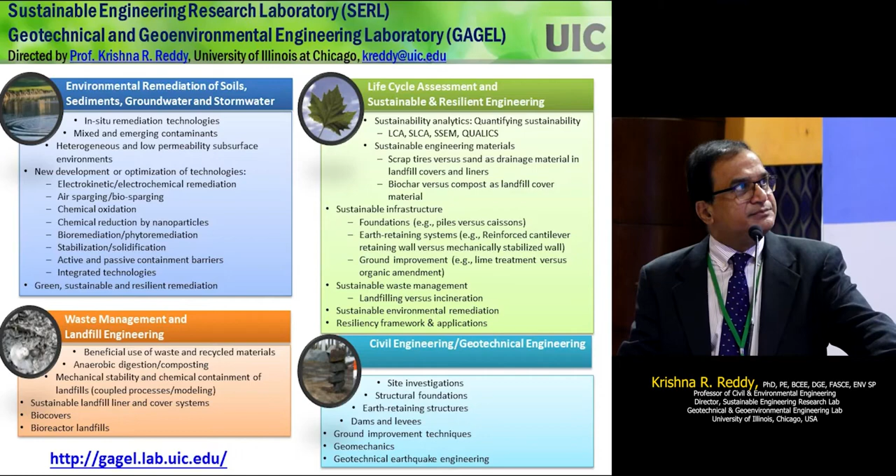I want everyone to take a step back and just think about it: what are the grand challenges that we have going forward? I know we're talking about climate change, but let's step back and see what are the greatest challenges we have in front of us into the future. Of course, the theme of this workshop is climate change, and that is going to be a grand challenge going into the future because of all the consequences we're seeing. It's going to impact current generations. We are all feeling it, and it's going to impact future generations also.

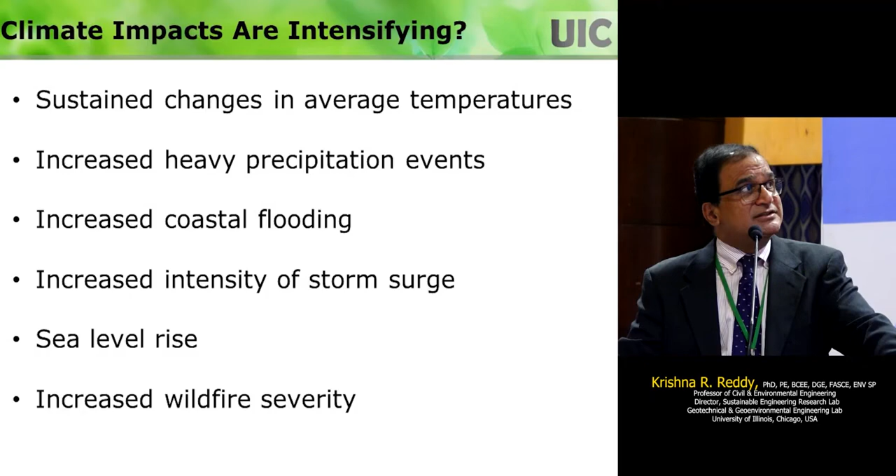We need to act. That's why climate adaptation is important, and climate adaptation is also known as resilience. The definition of resilience is this: whatever you are dealing with should have an ability to cope, adapt, and grow in the face of foreseeable climate and extreme weather impacts.

It could be flooding, extreme heat, or sea level rise, over the life cycle of the project. So think about not today or tomorrow, but if a roadway is going to be built for 50 years, you're talking about what the impacts will be in 50 years.

This graph shows: you design as usual, then an extreme event happens, and you compromise performance — it goes down, and hopefully it doesn't drop to the level of a disaster or catastrophic failure. Hopefully you maintain some acceptable performance, and after the event retreats, your system should return to acceptable levels, or in an ideal situation, back to the same as original, or in a very idealistic sense, perform even better than what it was initially designed for.

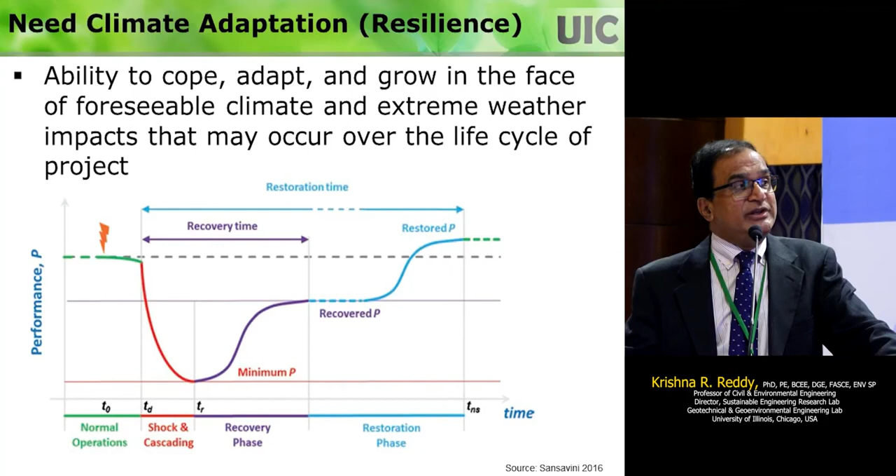So this is the challenge that we have. This is climate adaptation, or designing for resiliency. This means we need to be thinking about these things as we go into the future.

So how do we do this? There are a lot of different ways to do it. I call this one the adaptive management methodology, or climate resilient design framework. So what do you do? You identify the climate change hazards of concern, what is in your area, right?

These climate impacts affect different places very differently. If I'm not in a coastal area, I don't have to worry about sea level rise, if I'm inland. So what are the climate change hazards that you have at your location? And then you identify which ones you really are going to be worried about among the hazards of concern.

And then, whatever you are designing, you evaluate the performance of that. And if you are compromising the performance, what are the risks associated with that? This is called vulnerability assessment.

So you really need to think about, you need to do this for anything that you are concerned about. So if you have a high risk, then you need to do something, right? So you need to look at these resilience measures. How can you change your design?

If it's a new thing, you can incorporate it in a new design. But if it is an existing system, what can you do to make sure that it does not undergo damage if this perceived climate change hazard really happens? So you look at different options. You will have multiple options.

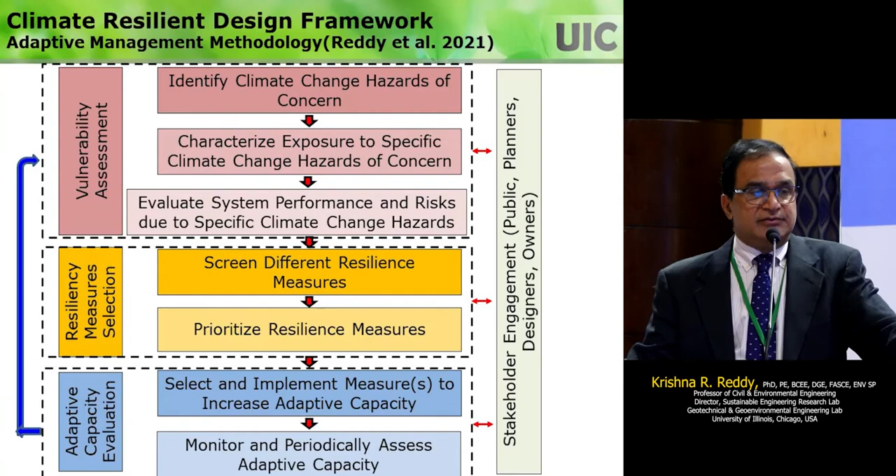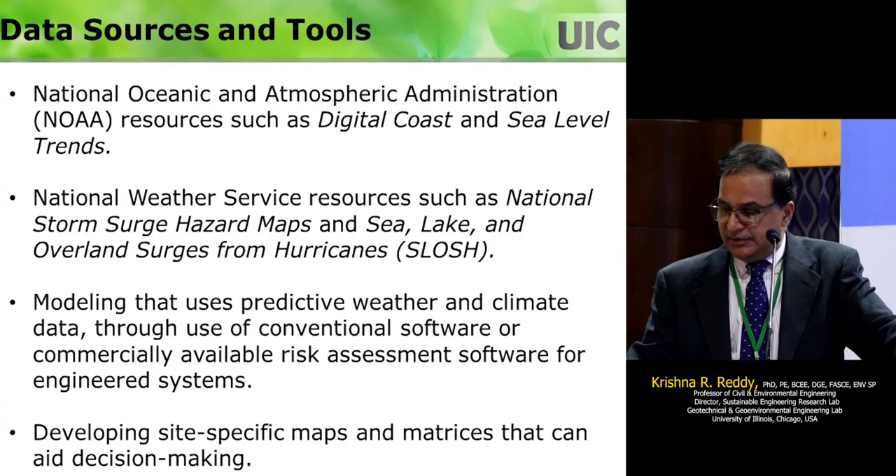And in the US, we have a lot of data sources and tools to look at these climate hazards. We use NOAA and the National Weather Service, and we do some modeling, and we can develop site-specific maps and matrices for design decisions. So one of the biggest things is what hazards we need to design for.

So I want to give you a simple example of resilient design. Let's say this is the building. This building is being proposed at a place called New Orleans in the US, right? So what do you see in this building? Generally, the foundation is at the ground level. Here, the foundation is not at the ground level, it is elevated.

Why? Because at this location, flooding is expected. And they modeled it, and based on that modeled depth of the flooding, they raised the foundations of the building. So this is what we are thinking about when you talk about resilient design - thinking about what kind of hazard we're going to have into the future, and then incorporating that now before we wait until that thing happens and undergo the damage.

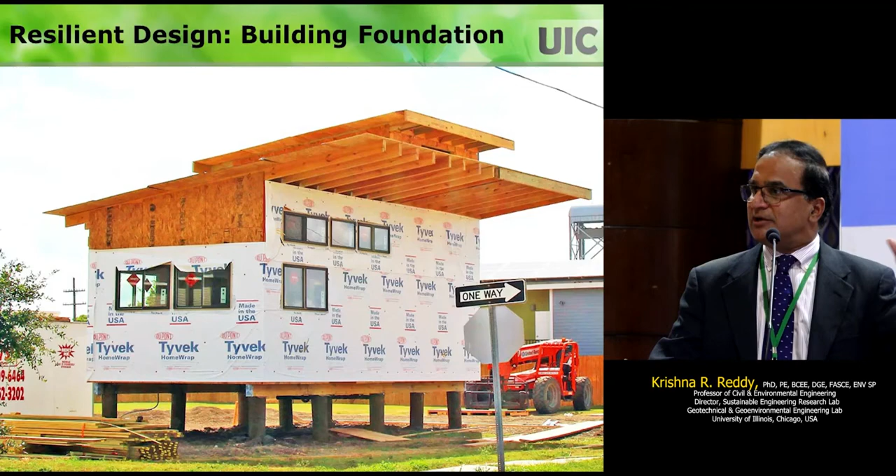So this example clearly shows a lot of things are happening like this in the US in actual designs. And this is actually built. This is a library building in New Orleans.

You just don't want to say, oh, I have a foundation raised, and I'm not going to have any problems. You need to be proactive. You see on the back of this library, there's a green infrastructure that allows the infiltration of rainwater, not allowing the flood water level to increase. So you need to be proactive on multiple fronts.

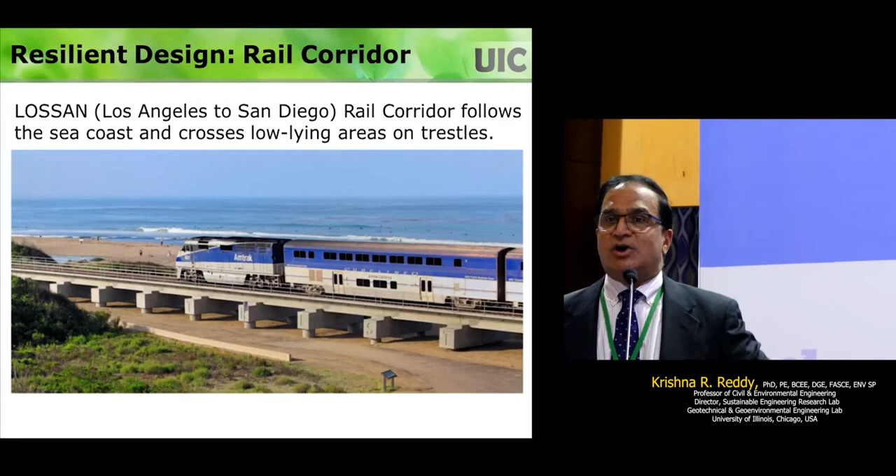I want to give you another example to understand what we mean by resilient design. This is the railroad line that goes from Los Angeles to San Diego in California, along the coastal area. What is predicted based on sea level rise is that if sea level rises as predicted, this whole railroad track is going to be underwater. The whole thing is going to be underwater, so this railroad is going to be out of business. So here's what we are doing, what is planned.

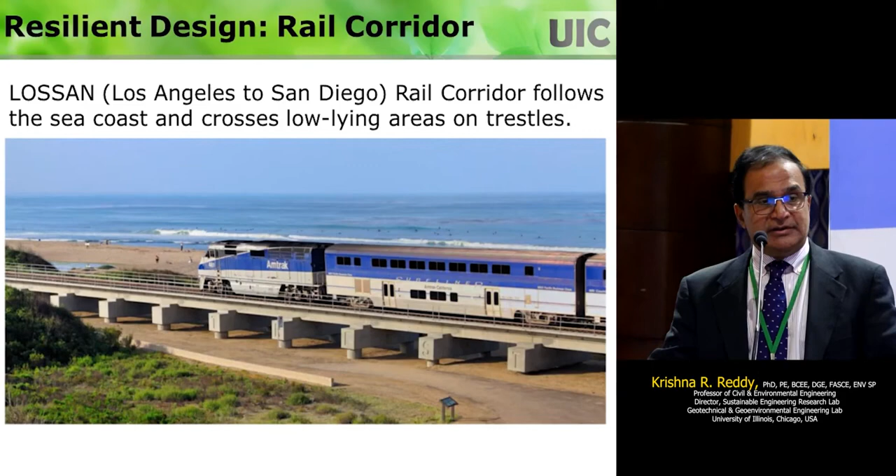So basically you have the foundation, the pier wall. The pier wall is going to be jacked up using a jacking system at the track, and then you increase the height of the pier. That's the plan. This is a kind of resilient design. So when you're looking at new systems, you want to design them in such a way that they can be modified to accommodate future impacts.

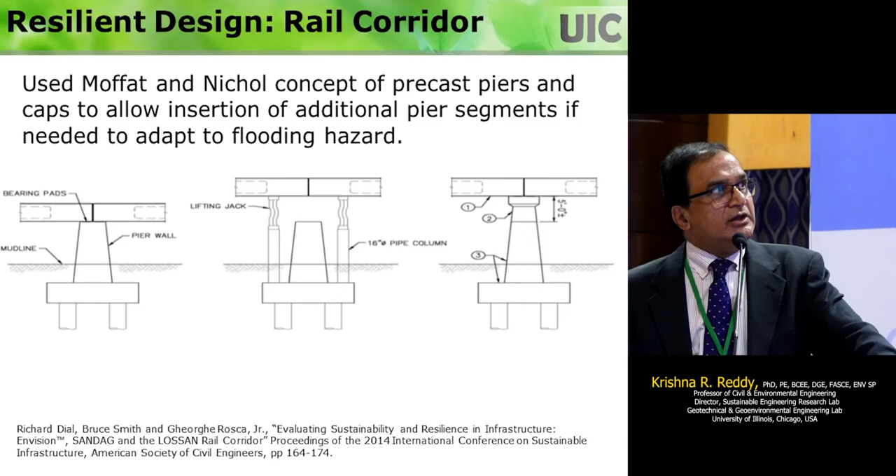We have a lot of landfills right next to water bodies, and we're expecting erosion, surge, and all those things. So now we're going back to these sites and retrofitting them so that the landfill covers remain intact, because underneath the cover is waste, and these are right next to surface waters. As water levels rise and surge happens, the cover, the soil on top, is going to erode, and then you have waste coming into the water. So we're actively retrofitting these things.

So those are the things that we are doing. Those are called adaptive measures or resilient designs. But that's a temporary solution. You're not addressing the root cause of the problem.

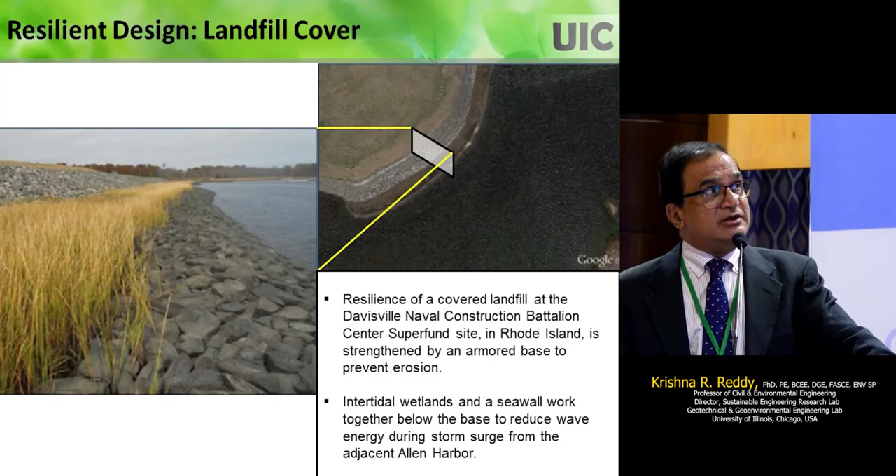The adaptation and resiliency options are going to be limited or very challenging if we have continued greenhouse gas emissions. That's the root cause of the problem. So that's why we also need to focus on reducing greenhouse gases, the root cause of these climate impacts. That's known as climate mitigation.

A lot of work is going on at many different levels. The IPCC came up with the Working Group 3 report, Mitigation of Climate Change. And a lot of cities in the US have their own climate action plans or climate mitigation plans. If you look at the IPCC report, to reduce greenhouse gases, they identified different mitigation options in different sectors. Energy is one big thing. They estimated how much greenhouse gases could be reduced in these different sectors.

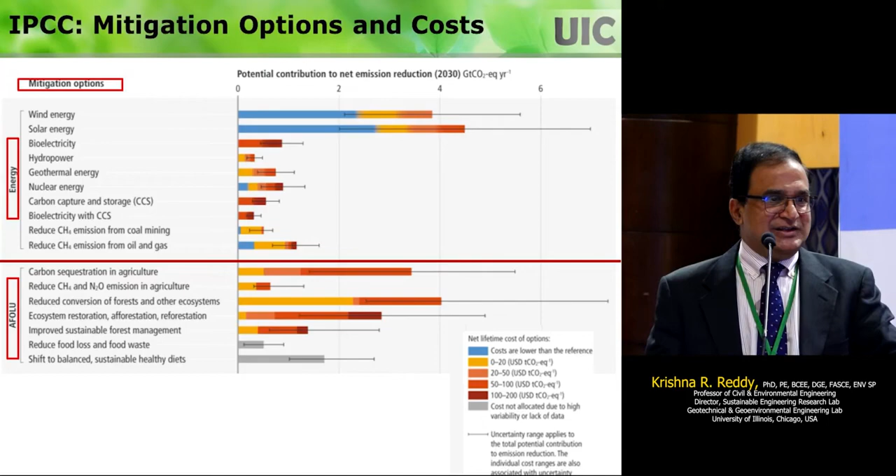Energy sector is one big thing, agriculture sector is another. I'm not going to go into all these details, you can get the IPCC report and look at it. If you want to make a big impact on reducing greenhouse gases, these are the things you should be doing. Buildings are going to be huge greenhouse gas emitters, and transport industry is another. So you can look at all these different fields and find different options to follow to reduce greenhouse gases.

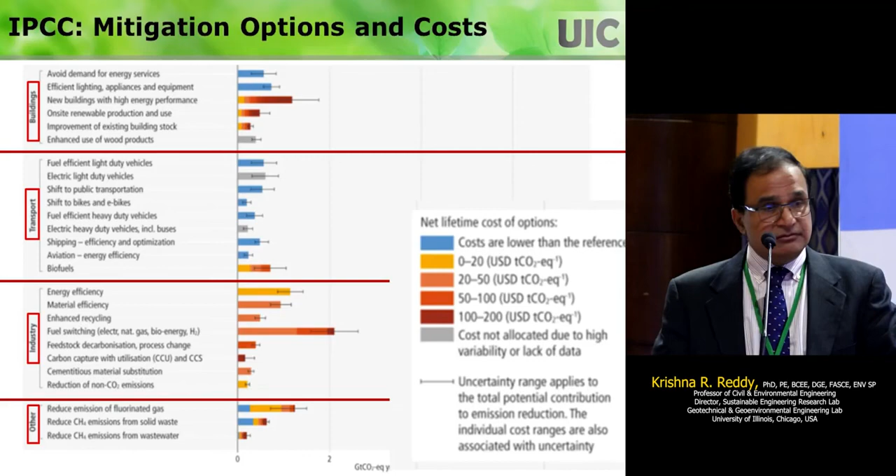Chicago, the city I come from, just released their climate action plan last week, an update to their existing plan. A lot of people say carbon neutral, but being honest here, Chicago is going to have a 62% reduction by 2040. A lot of people say zero, but zero never happens. Here's a practical way to reduce greenhouse gases.

In the process, we should be looking at co-benefits. How is it going to benefit the people? How is it going to benefit the economy? These are all things you need to consider when planning these things.

The resiliency, I mentioned about it. Climate mitigation comes as a part of sustainability. In the long run, we want a good economy, good environment, good society. Sustainability is a kind of mitigation plus more, looking into having really sustainable development into the future. The resiliency is taking care of these impacts that we're going to see. They overcome unexpected crisis, adapt to turbulent change, and flourish in a chaotic world.

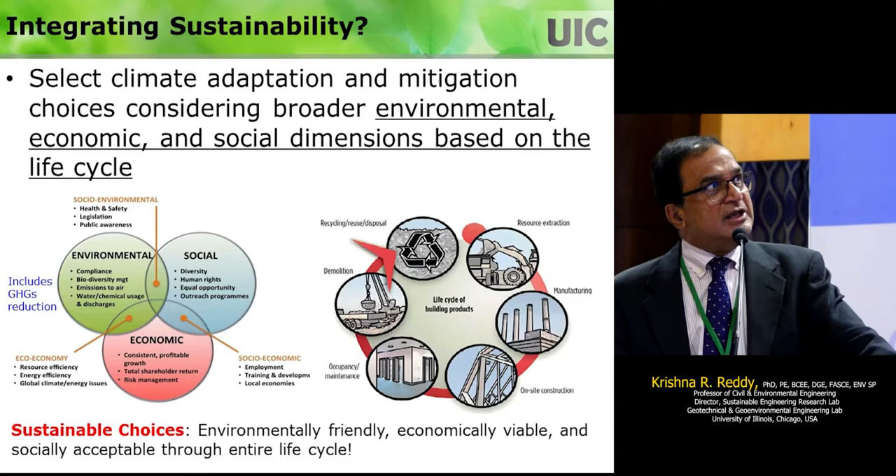Sustainability projects get confusing, but you need to realize that sustainability can be at different scales: global scale, national scale, regional scale, business or institutional scale, or sustainable technology scale. A lot of the work presented here could be at the regional scale. You can contribute at any level. In my case, teaching students at my university, I focus on the last one, sustainable technology scale.

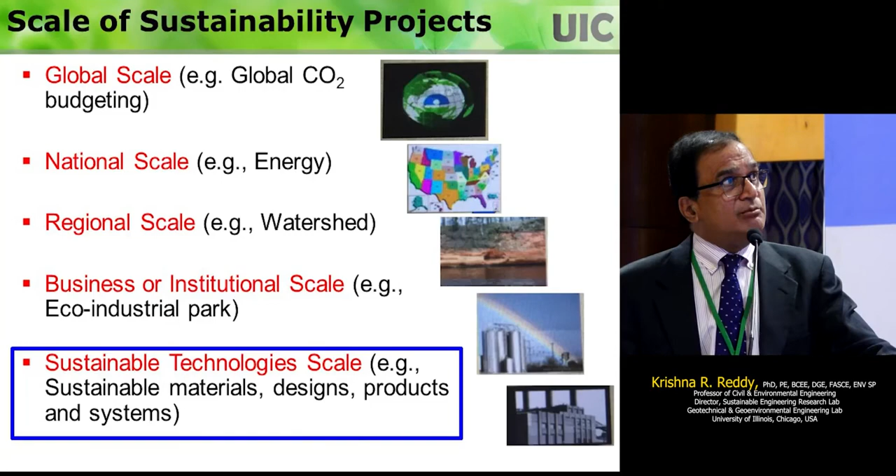Climate and resiliency is your climate change issues. But in the process, when you're designing, you need to address these other sustainability aspects. Some of them are social, some of them are economical. And it's a great way to look at it.

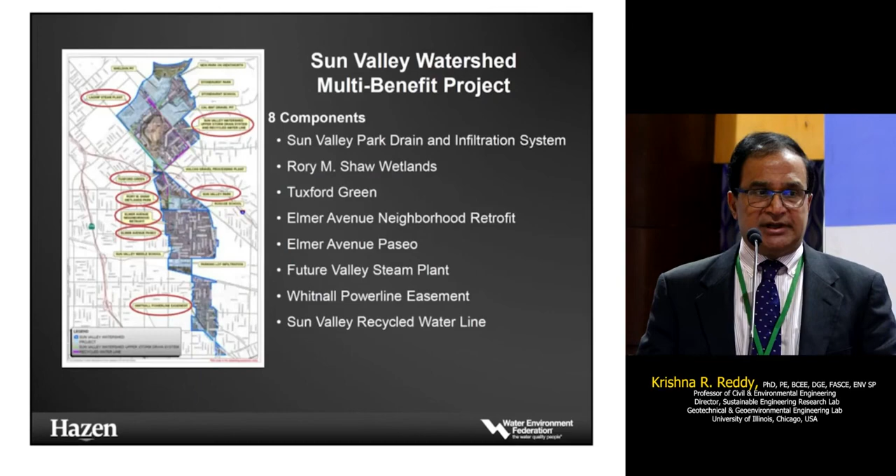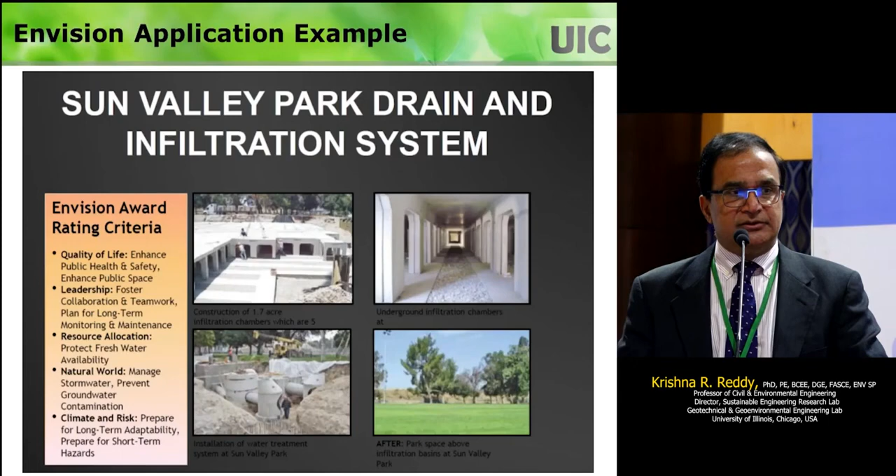Based on the rating tool, you can score what level of sustainability is incorporated, and there are awards depending on how much score you get. On the other hand, that kind of rating tool is good for applying at a regional scale, but I was looking at more of a project component level.

So I developed this tool. It's called TQUALICSR, basically a tiered quantitative assessment of life cycle sustainability and resiliency. It integrates the technical aspects, resiliency aspects, and sustainability aspects.

So this is what I'm trying to promote, in teaching and also in industry to day-to-day engineers. This has 4 phases, and each phase has a step-by-step process you can follow. A lot of times people want to do resilient design, sustainable design, but they don't know how to start. So this is kind of a roadmap: step 1, step 2, step 3, step 4. Doesn't matter what you're doing, whether you're designing a beam, a column, a roadway, anything—this protocol works.

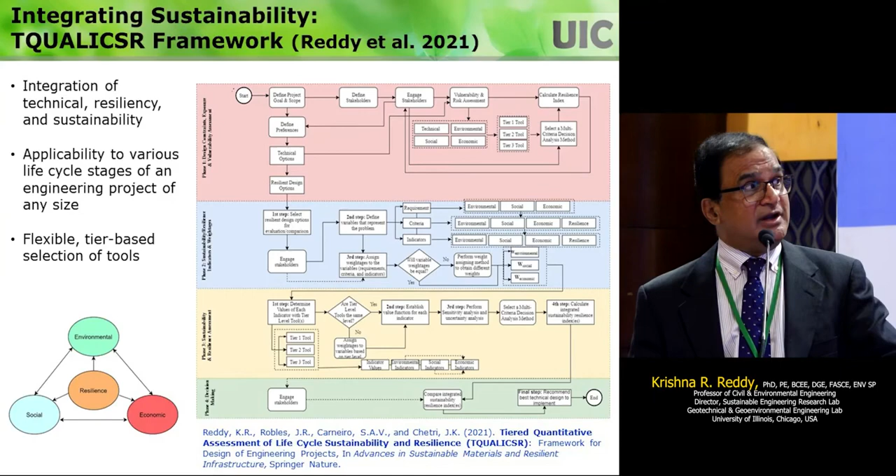So the first one is all about addressing the resiliency. The first thing you need to look at is making sure your design is resilient to the climate impacts. As I mentioned, we follow this adaptive methodology, and one thing you need to do is quantify the resiliency. We'll have multiple options, and for each option you can come up with indicators and metrics, then calculate the resiliency index. If I have 2-3 different options, I can look at the resiliency index for each, and the one with the highest resiliency index would be the best thing. And then you choose...

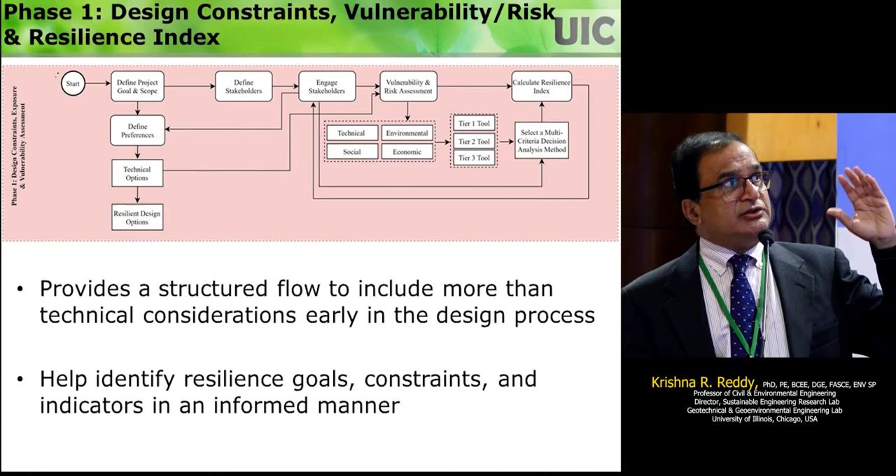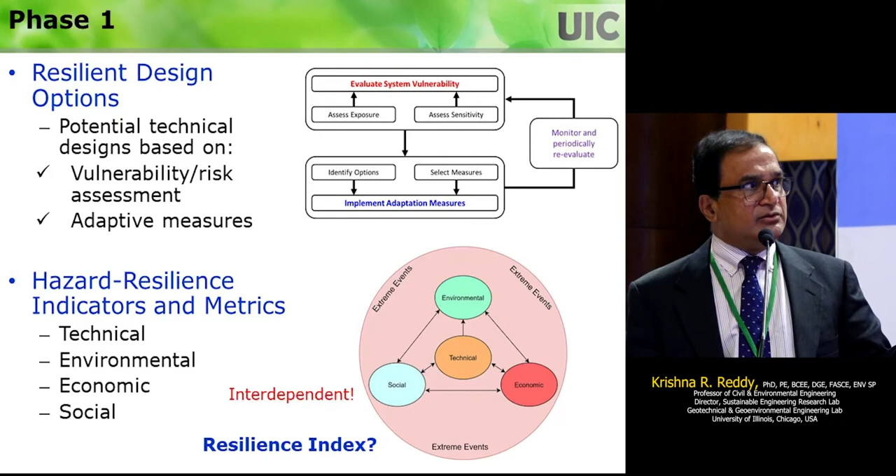...the possible resilient options, and then conduct the sustainability assessment. The sustainability assessment is all about looking at environmental indicators, social indicators, and economic indicators, and also adding the resiliency indicators and having metrics for them. So you need to be able to calculate those metrics, and this is where it's challenging. This methodology will allow you to use any information that you have—qualitative or quantitative. It's very flexible. Sometimes you just have best management practices, so you can still incorporate those things. Semi-quantitative, more like rating tools, or a life cycle assessment, more detailed quantitative tools. So this methodology can allow you to input whatever information you have, and then you can do this assessment. The tiered approach is the one I've been recommending, because a lot of times when you do these assessments, data limitations is the biggest problem.

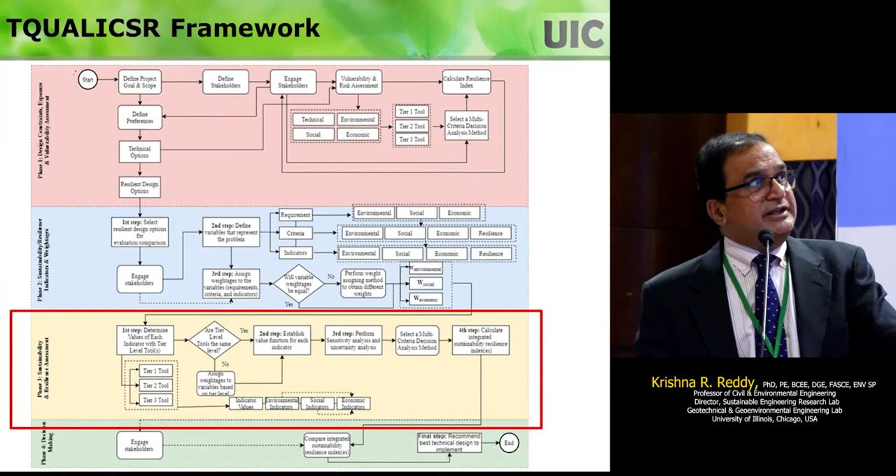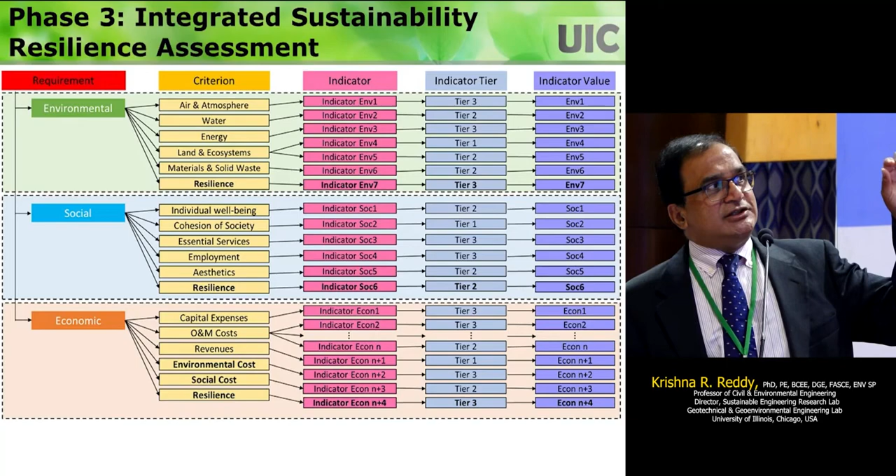And so in phase 3, finally, once you have that, you can calculate the sustainable resilience index—how sustainable it is, how resilient it is. That's the final output. And then, once you get that, in the framework you see there is stakeholder engagement at every level. You cannot do anything without stakeholder engagement. So each phase has this stakeholder engagement.

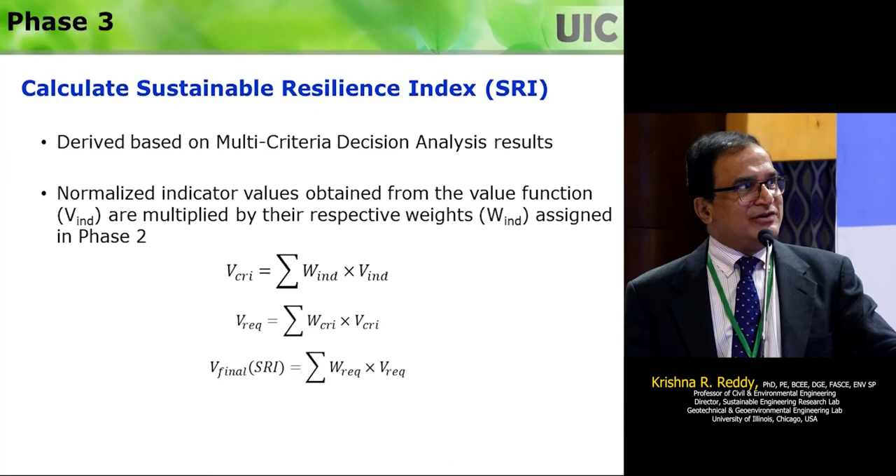Sometimes these numbers don't matter at the end. Decisions are made by the stakeholders, whatever they prefer. So the budget is one thing, and the social acceptance—what people accept—and stakeholders' preference is the other.

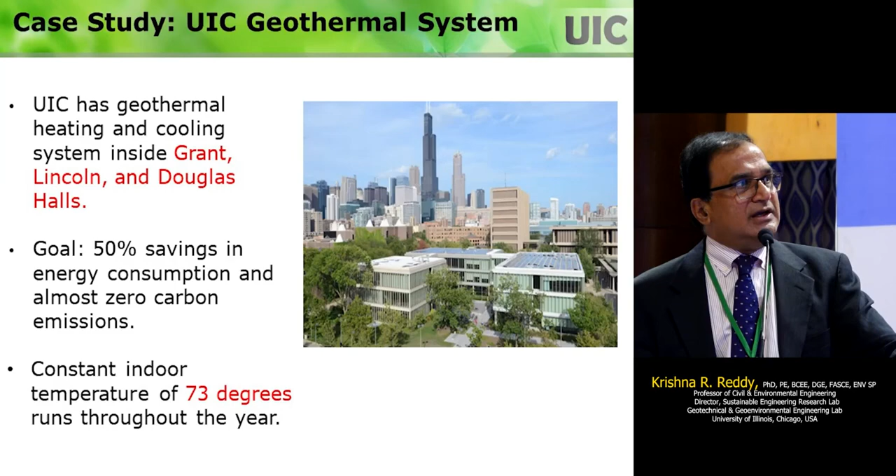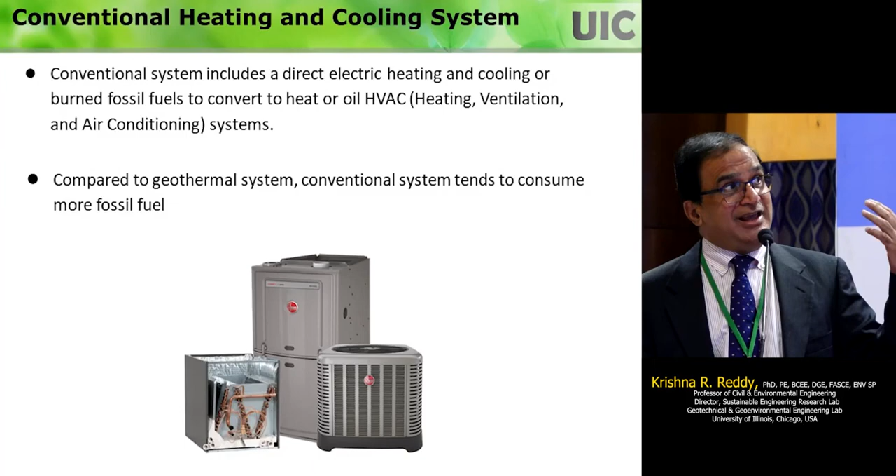So just to show you how this could be applied, we have a geothermal system. The buildings are powered with that, and the other option would have been using the conventional heating and cooling system. So is it sustainable? Is using geothermal resilient and sustainable? So I applied this framework, and I looked at the resiliency aspects, and then calculated what would be the resiliency index of it.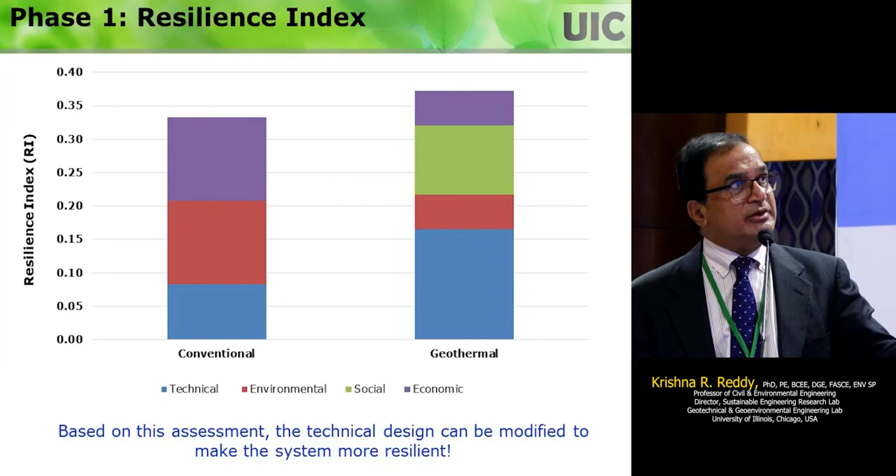There's not much difference—this geothermal is slightly higher than conventional from the point of view of resiliency, coping with extreme heat, for example in Chicago. But when you apply the sustainability factors after resiliency, you see a huge difference in geothermal. So geothermal has the highest sustainable resiliency index. These kinds of assessments will demonstrate quantitatively how good you're doing from a resiliency and sustainability point of view. But as I told you, the final decisions on all of these projects are not based on the numbers. The numbers guide you towards rational decisions, but a lot of final decisions are made based on these other factors. So I just wanted to mention that.

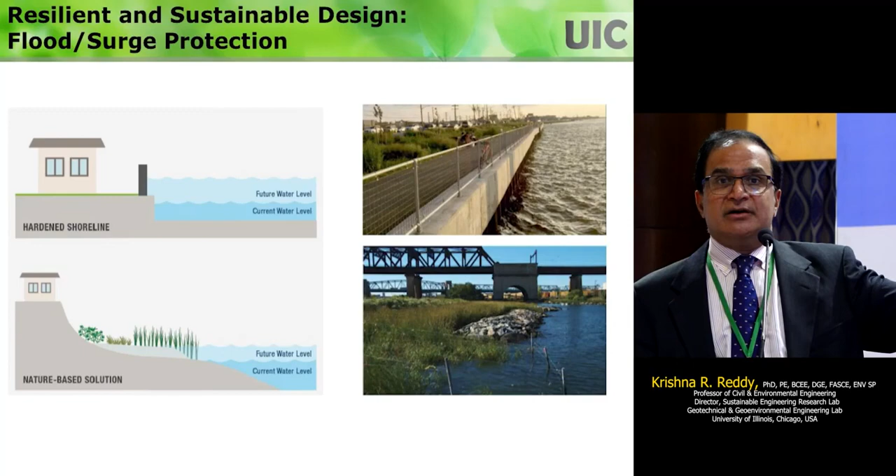One of the things we're doing now is looking at resilient and sustainable designs—which ones have possibility. For example, in coastal areas we used to put concrete seawalls. They are not resilient, they are not sustainable. So we're looking at floodable parks as an option where, if a surge comes or sea level rises, the park is going to be inundated. But that's okay, nothing is going to be damaged.

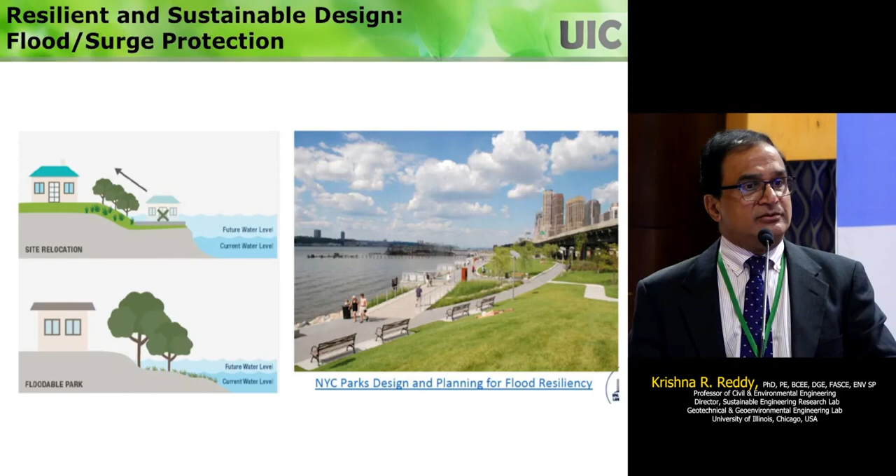So we're going into these nature-based solutions extensively. Even in New York, we're using these floodable parks. This has become very important from the lessons learned in New York from Hurricane Sandy, and now they've mapped what areas are going to be affected by future hurricanes, and they're looking at these kinds of systems.

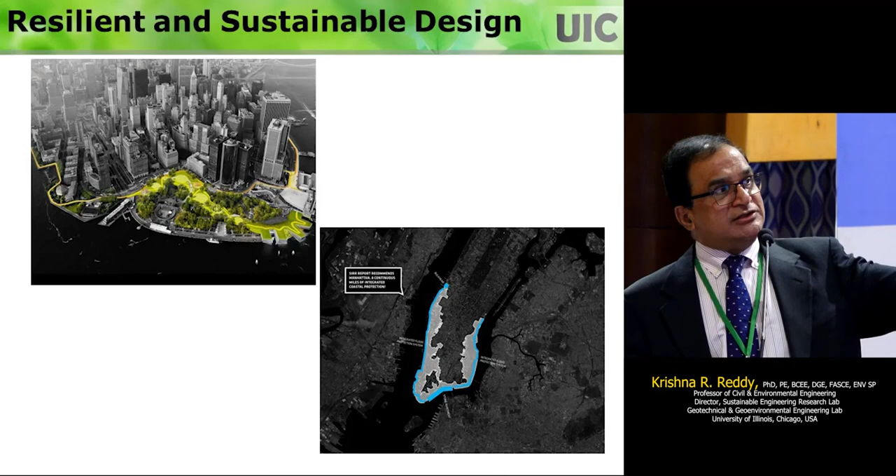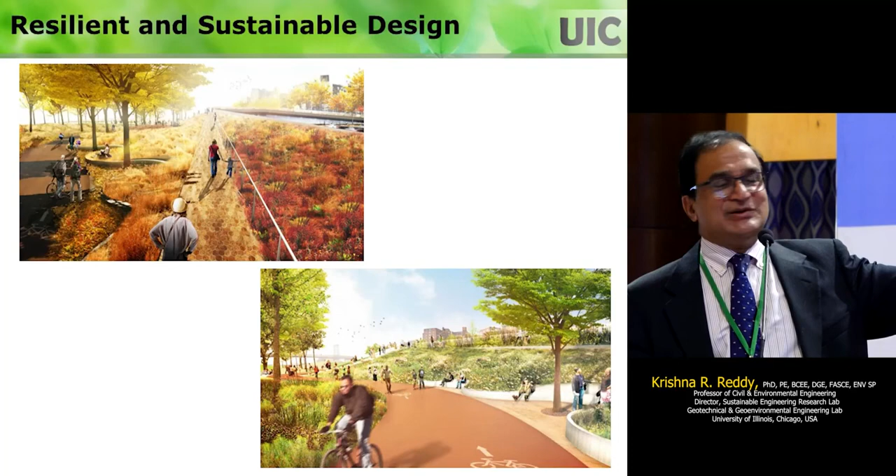I wanted to mention this because instead of having a seawall, they are constructing these parks in a clever way. As you see here on top, it's a park with stairs, and people can come and sit down and enjoy the ocean and everything.

But then when a hurricane comes, people are going to run away and go home, and then you see those steps that you have become a retaining wall system.

So as the water level rises, you can see that the other side is the city. The city is not going to be flooded. So it's kind of these designs, resilient and sustainable, with social and economic aspects, all those things.

So again, this is kind of a park. One side is the ocean and the other side is the city. And look underneath this, the train track is ugly. So they want to convert this into an area that could be utilized.

Again, you see on the left side the stairs that become like containment if the water level rises. So when water comes, you can see that the stairs are protecting the other side of the city.

You can even have these systems that are hinged, and then they can lift it up to increase the height if you want. So there's a lot of work happening all over the world to make sustainable and resilient designs, all based on nature-based solutions.